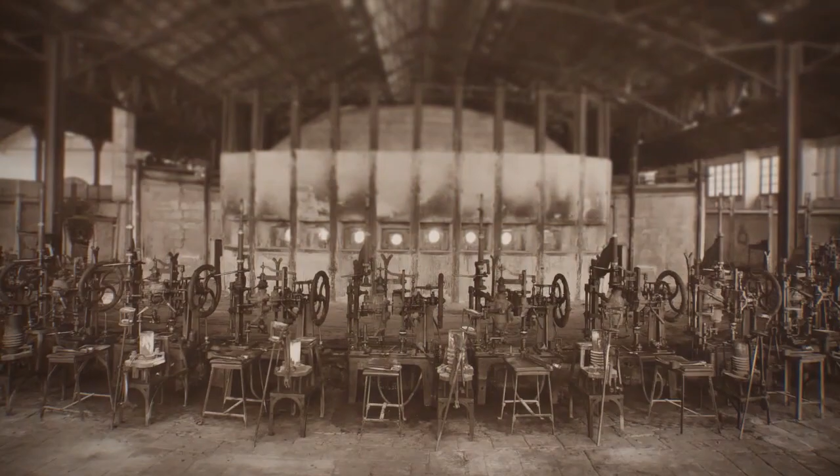BA, as we know it today, has a long and rich history. Since 1912, BA has gone through several important changes. It currently produces and sells glass containers which are used in the food and beverage industry. BA's products can be found in numerous countries, and it produces millions of glass containers on a daily basis.

Glass is such a common material in our lives that sometimes we do not even notice it. Glass appeared thousands of years ago, but if you think that the process of making glass is simple or even rudimentary, think again.

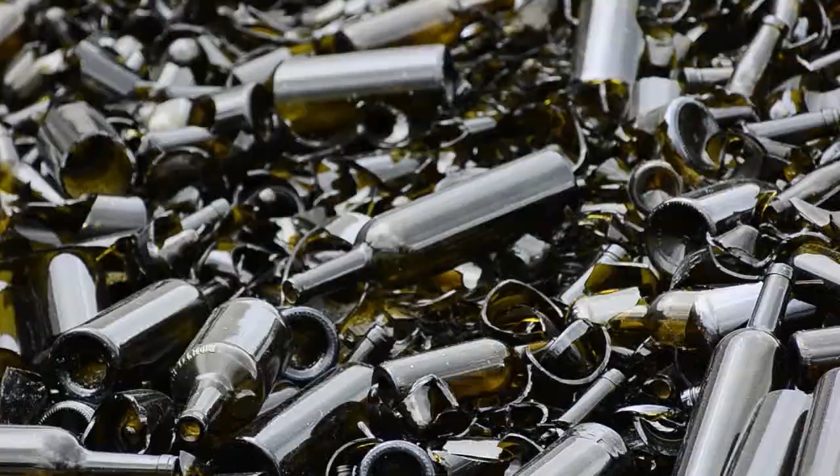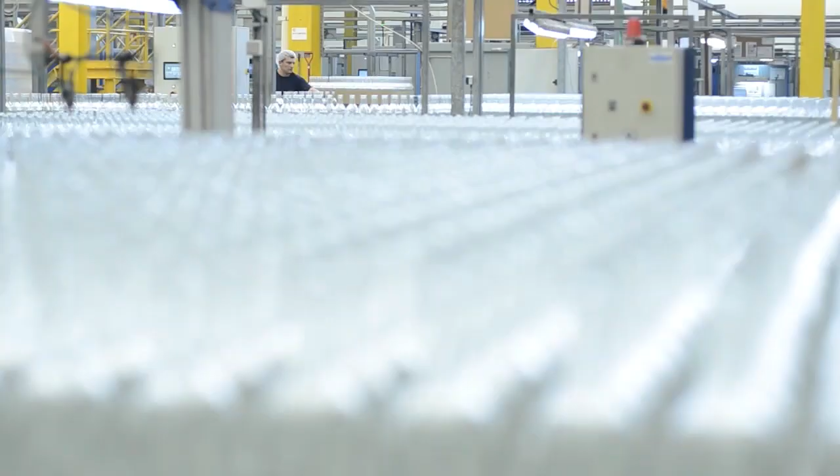The process of producing a simple glass container goes through several stages, each with its own complexity, procedures, features, and even technologies. And it all starts here, in the partnership with our customers, in analysing the whole chain of value, in searching for opportunities to improve efficiency and reduce environmental impacts. BA intervenes in the value chain with the intent of optimising resources in order to reduce costs and share the created value.

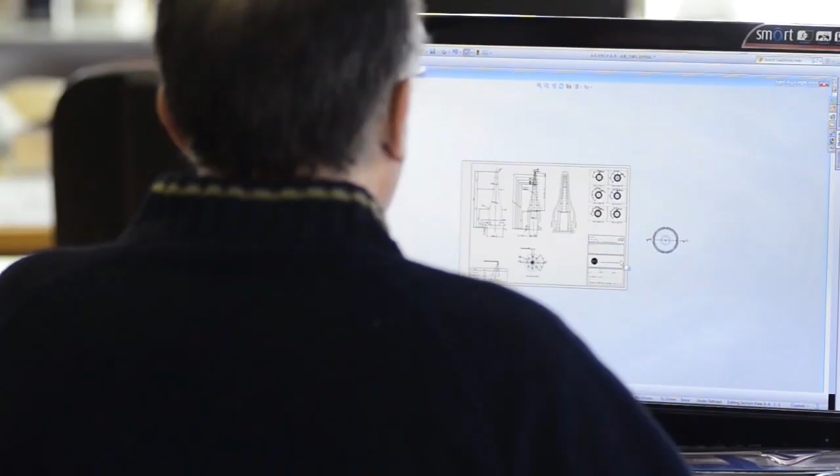The key words for our strategy are innovation and customer proximity. BA strives to understand market dynamics and be able to satisfy and surprise our customers with better and more appealing proposals. So how is a glass container produced?

Everything starts with recycling. A pile of used bottles, once separated, cleaned and recycled, will make up at least 60% of the raw material needed for a glass item. Glass is the only material that is 100% recyclable and that can be used endlessly. It is a sustainable package and it has no flavour or odour. It works as a natural barrier that protects the products to which it gives shape. The quality of the glass and its characteristics never change.

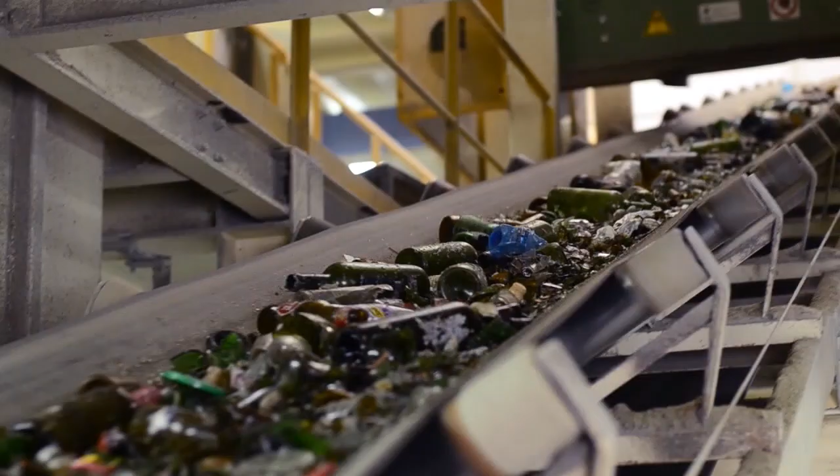When we recycle, we are contributing to a better environment by using fewer raw materials, reducing energy consumption needed in glass fusion, generating less carbon dioxide, and reducing the volume of waste that is deposited in landfills.

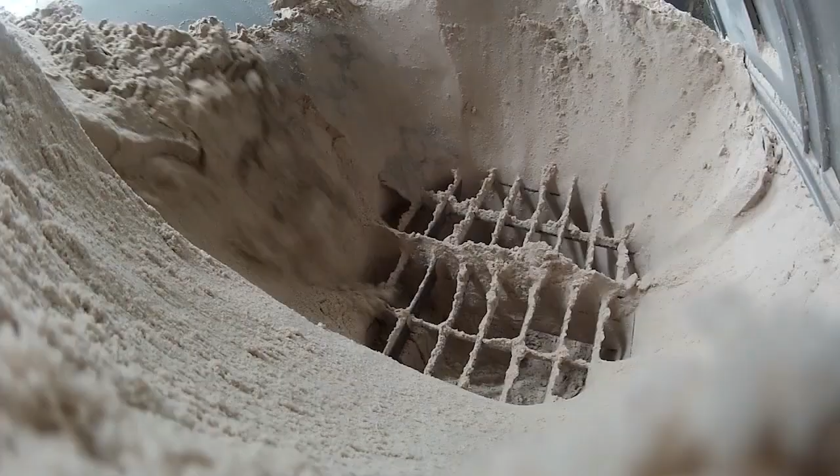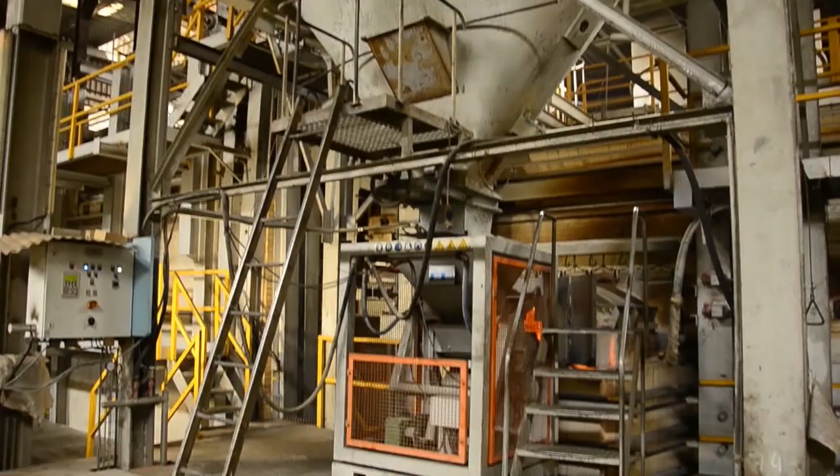In the course of making glass, other ingredients are added to the recycling process, such as sand with a high content of silica, limestone is added as a stabilizer, and sodium carbonate is used to lower the melting point and save energy. The raw materials are stored in silos to be mixed later. The dough that is formed is then transported through a network of conveyor belts and taken into the refractory furnace.

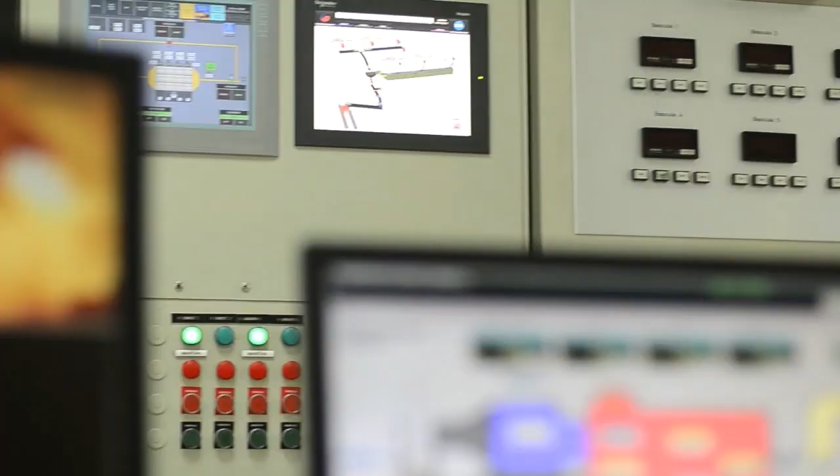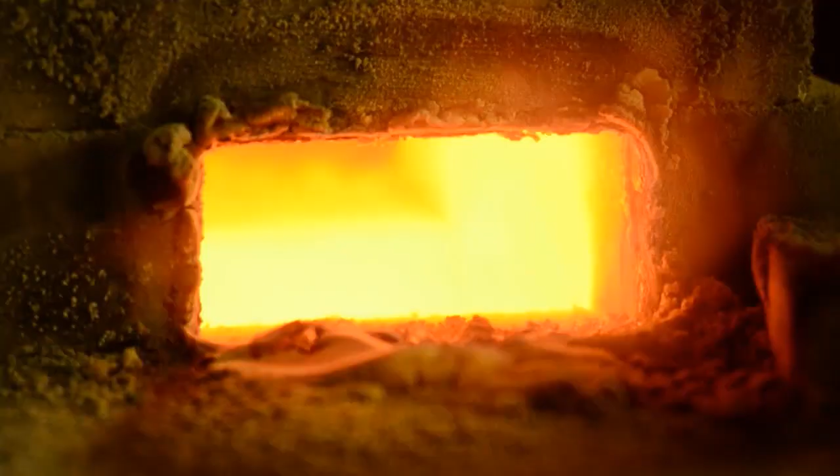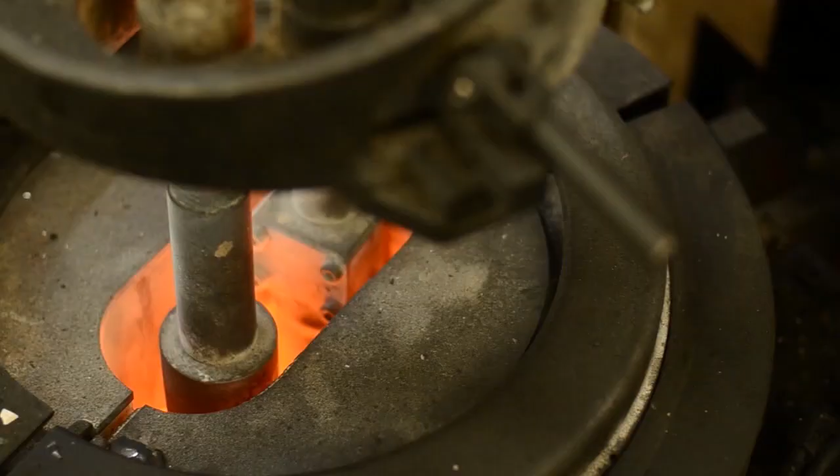With the control panels of the fusion furnaces, you can, in real time, regulate the temperature of the furnace. Once in the furnace, the glassy dough is fused at a temperature of 1500 to 1600 degrees Celsius. The period of time from the homogenization of the raw materials to the exit of the fused glass is about 24 hours. The glass in its liquid form flows in refractory channels or feeders to the production line.

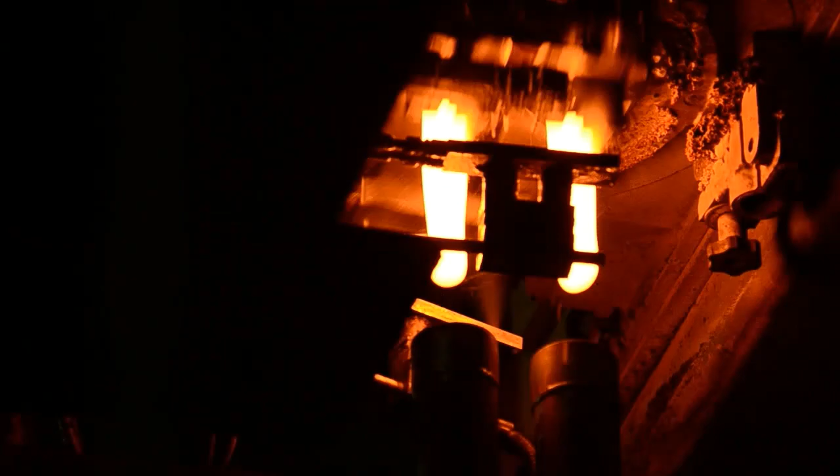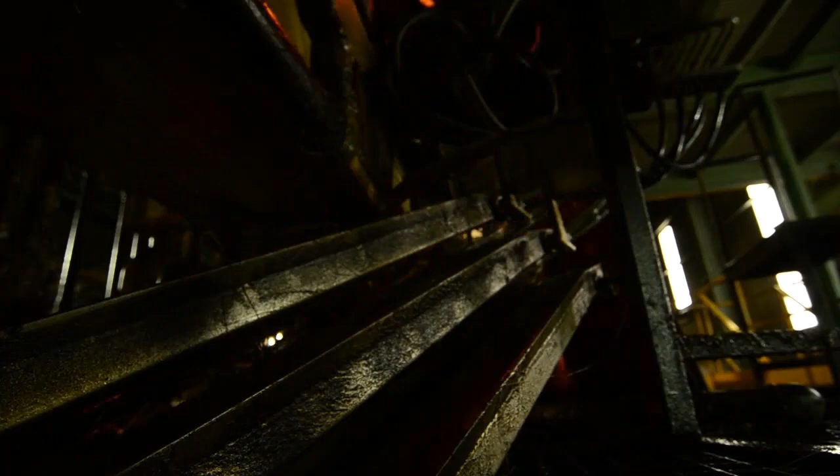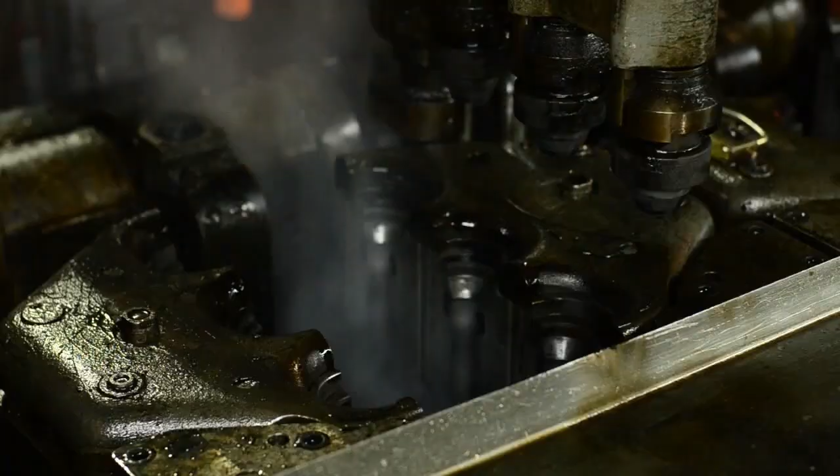The process begins with the cutting of the glass gob, which is thrown by gravity and led through rails into the automatic moulding machine. The glass gobs have the exact amount of glass needed. The moulding procedure is twofold. Firstly, the gob falls into a pre-mould where a preform is created. Then, this preform is taken into a second mould from where the final shape of the bottle will emerge.

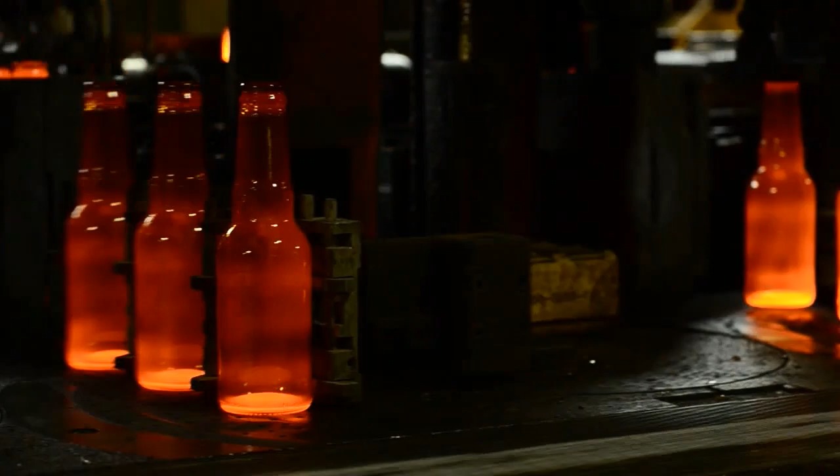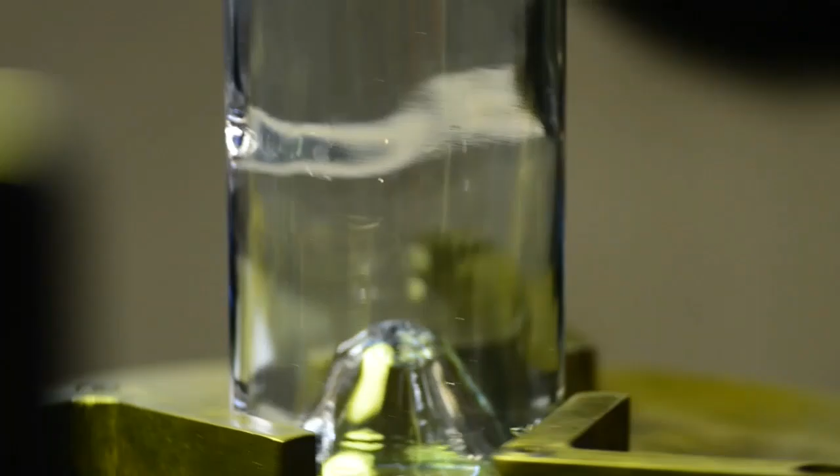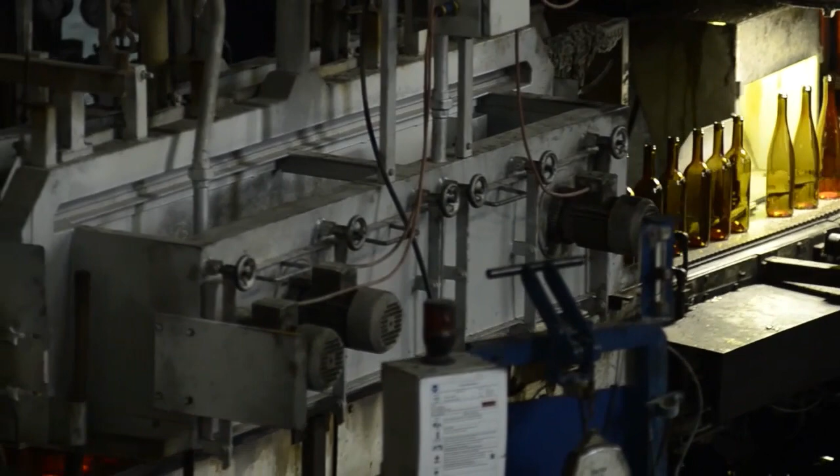When the bottles are freed from the moulds, they are at a temperature of about 600 degrees Celsius and are then cooled down abruptly, which causes internal tensions. In order to release some of these tensions, the bottles are then led to the annealing lehr, where they are subjected to a new temperature rise of up to 650 degrees Celsius. The annealing process takes approximately 1 hour.

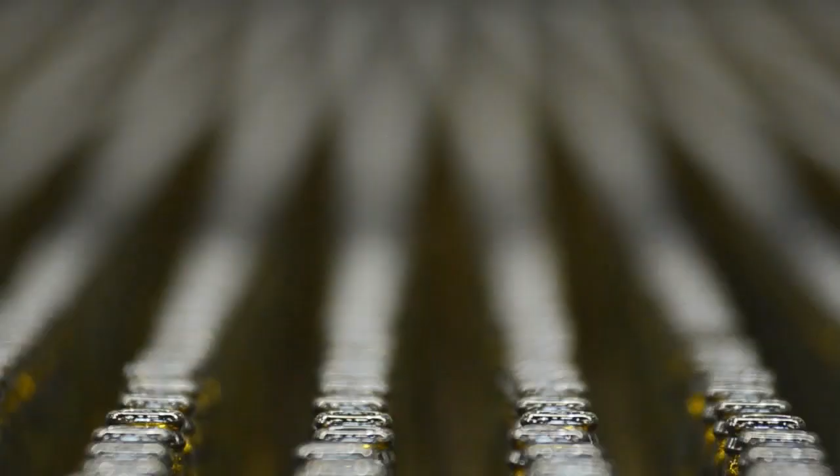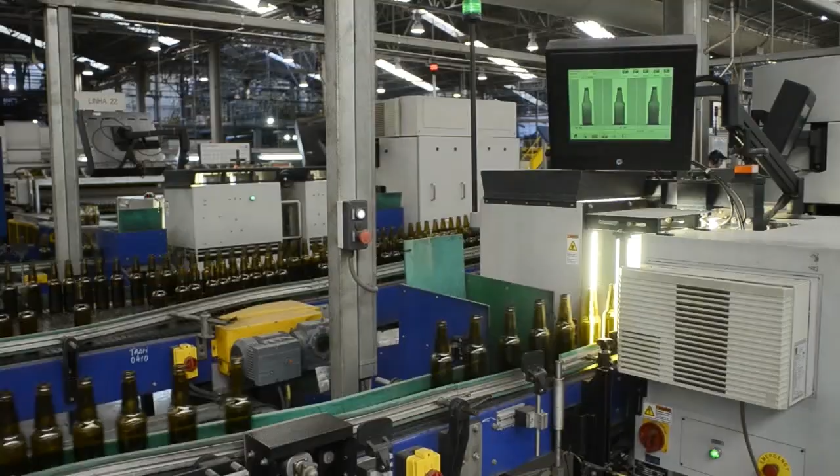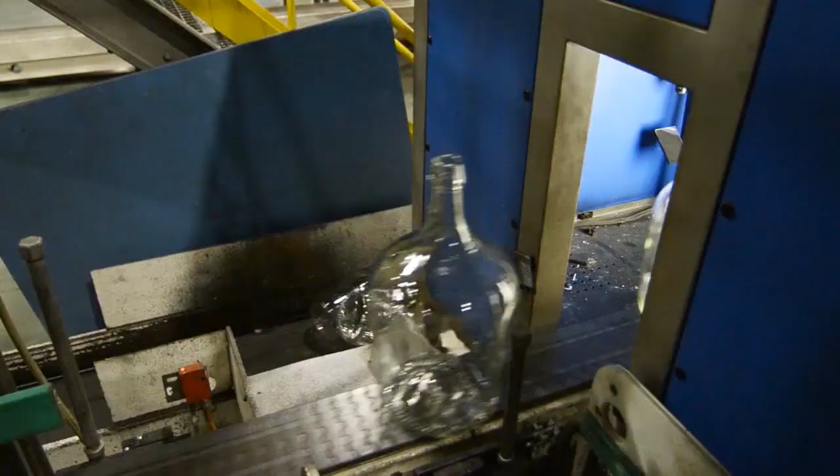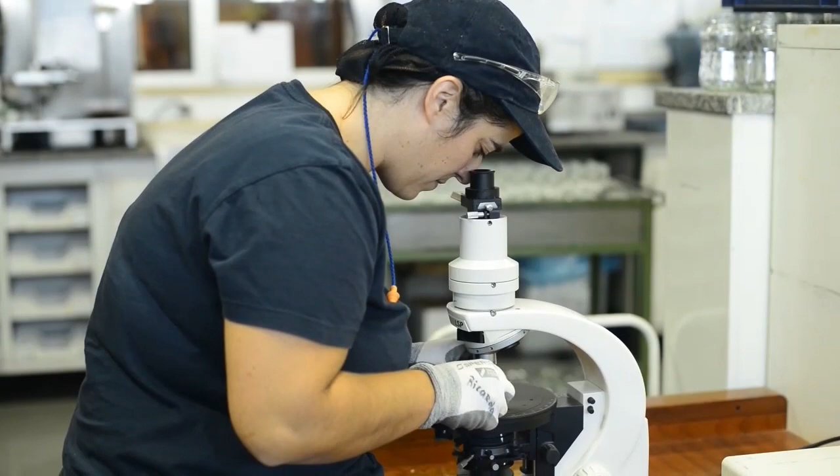After annealing, the bottles are then taken to the automatic inspection zone, also known as cold end, where several inspection machines check all the bottles and detect visual, dimensional, or even thickness defects and cracks or breaks. The bottles which do not comply with the quality criteria are automatically rejected from the production line and incorporated into the internal cullet circuit to be recycled again. Samples are taken into the laboratory in order to be analysed for other dimensional characteristics and tested for mechanical resistance.

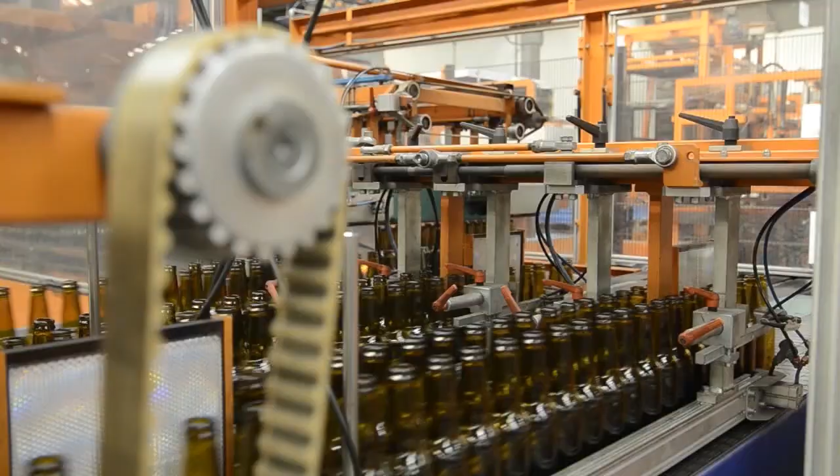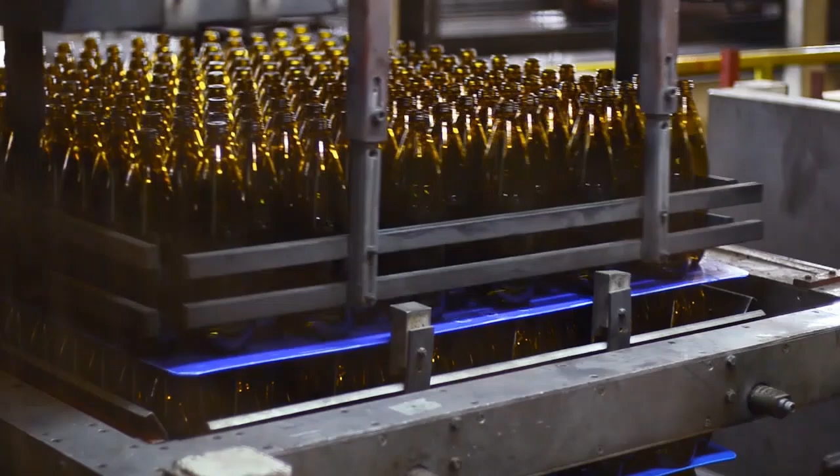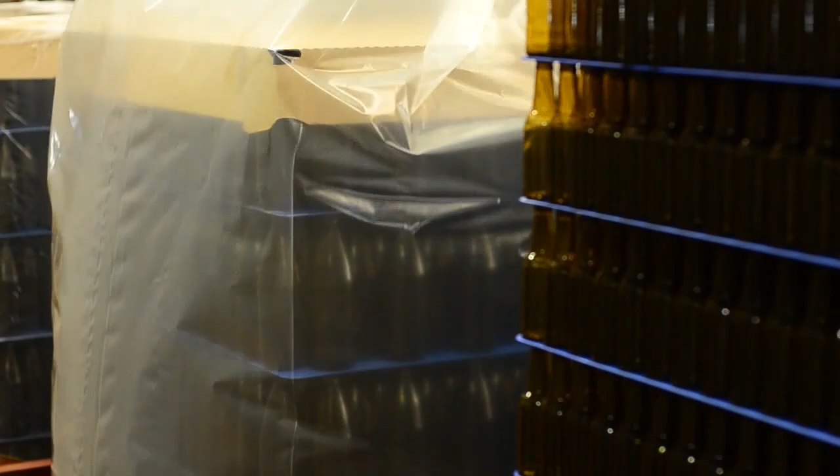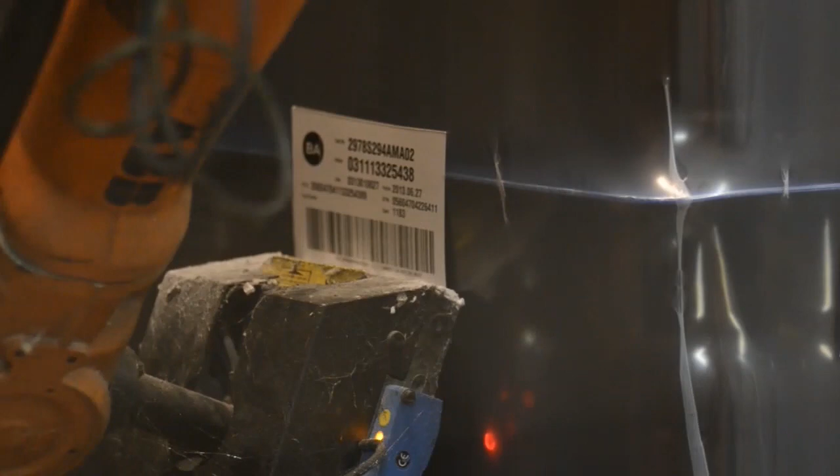Palletizing is the following step. The bottles are packed in layers and stacked on pallets so that they can be moved around. The bottles are then taken to the dressing zone, where the pallets are covered with a plastic cover and labelled. At this point, the pallets are ready to be sent to the end customer.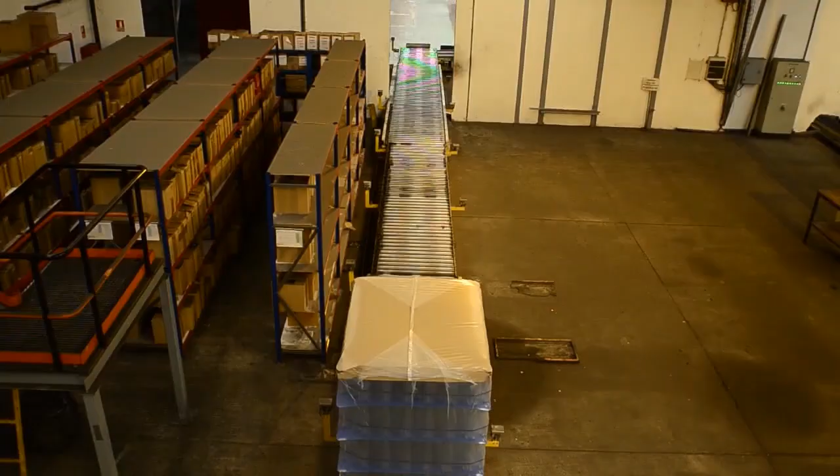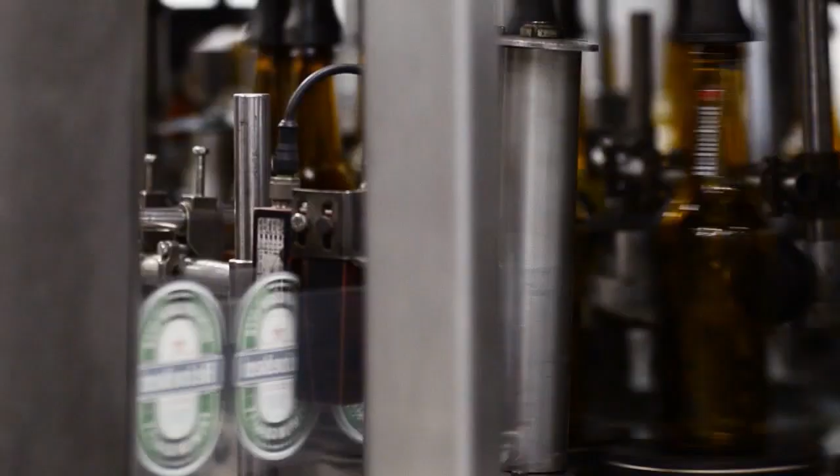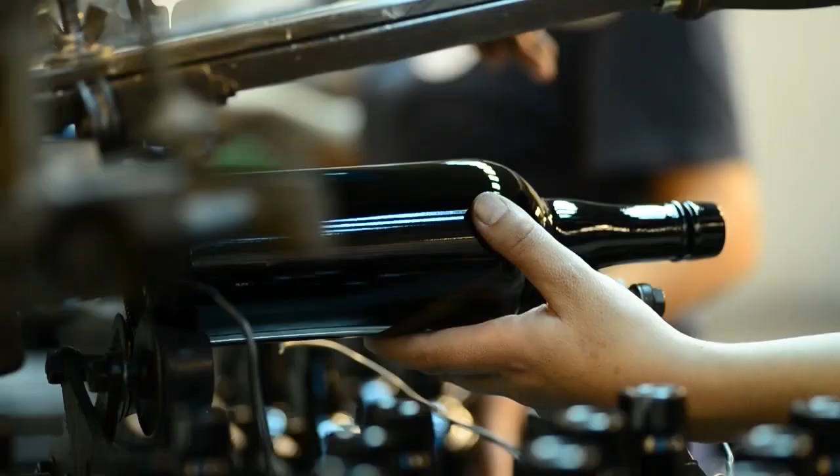A glass container can have various shapes and a wide variety of decorative techniques. At BA, we endeavour to obtain what was originally imagined, and therefore we have various decorating techniques available, such as painting, PSL, sleeving, engraving, or silk screening.

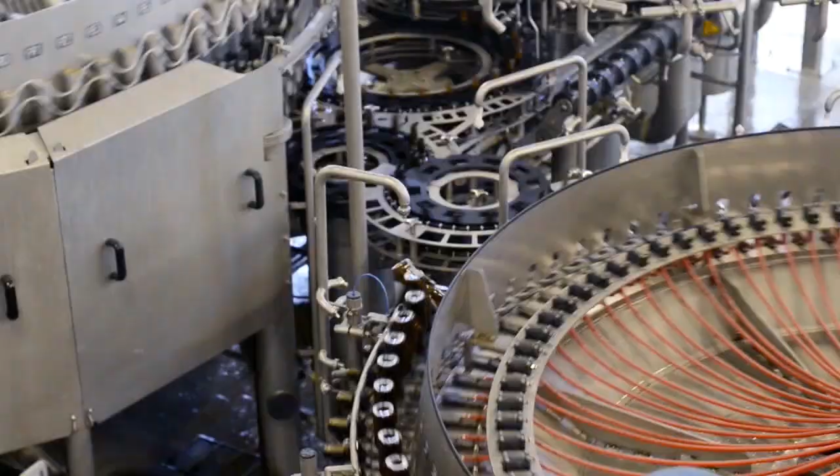After leaving the premises, the glass containers go to the customers to be used in their filling lines. This is where the glass containers shape the final products that are part of our daily lives. Glass containers are like a business card, which allows first impressions with the product we choose. And even without thinking about them, they are a permanent presence in our lives.